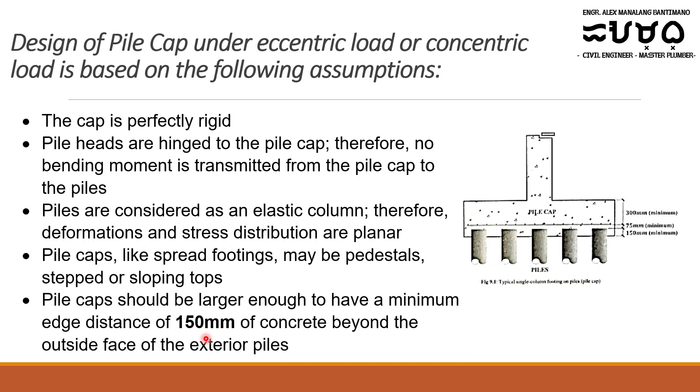Minimum of 150. Next, piles are embedded at least 150 millimeters into the cap. As I've said, the minimum embedment of the piles into the pile caps is 150 millimeters.

Reinforcement bars are placed at a clear distance of 75 millimeters above the pile head. So our reinforcement for the pile cap has a concrete cover of minimum 75 millimeters from the top face of the piles up to the outer surface of the reinforcement, elevated by 75 millimeters from the top face of the pile.

So to recap: from the bottom face of the pile cap, we measure a minimum of 150 millimeters as the minimum embedment of our piles. And from the top of the piles, we measure a minimum of 75 millimeters, where we place the reinforcement for the pile caps. Anyway, in the succeeding presentation we'll cover common placement of reinforcement in piles and pile caps.

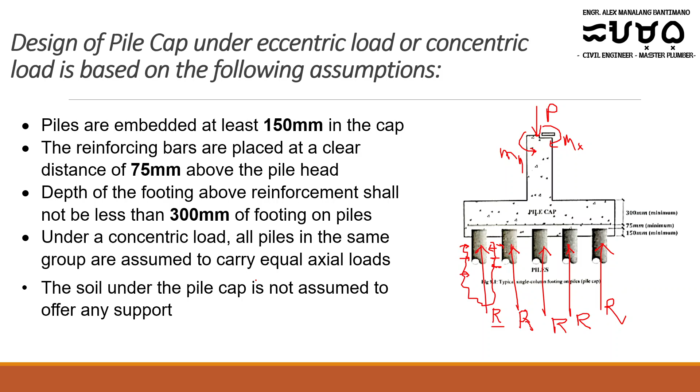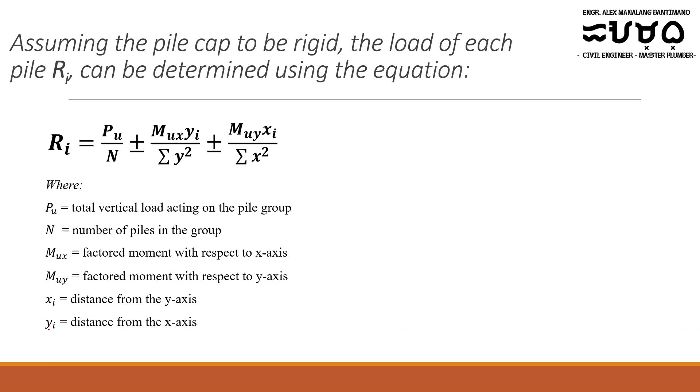So meron tayong general formula for biaxial bending: Pu over n plus or minus Mux yi over summation of y distance squared, plus or minus Muy xi over the summation of x squared, whereas Pu is the total vertical load acting on the pile group, n is the number of piles in a group, Mux is the factored moment with respect to the x-axis, Muy is the factored moment with respect to the y-axis, xi is the distance from the y-axis, and yi is the distance from the x-axis. So don't be confused on these parameters.

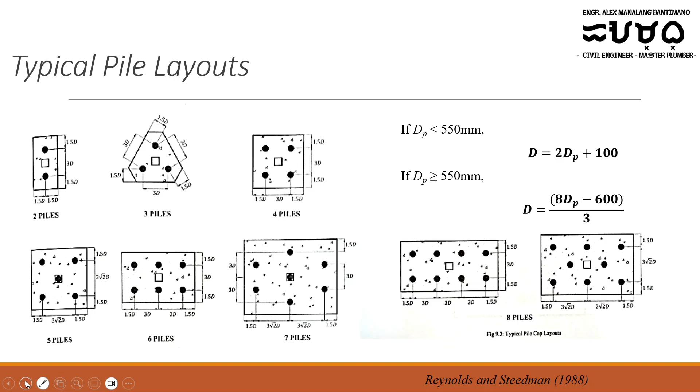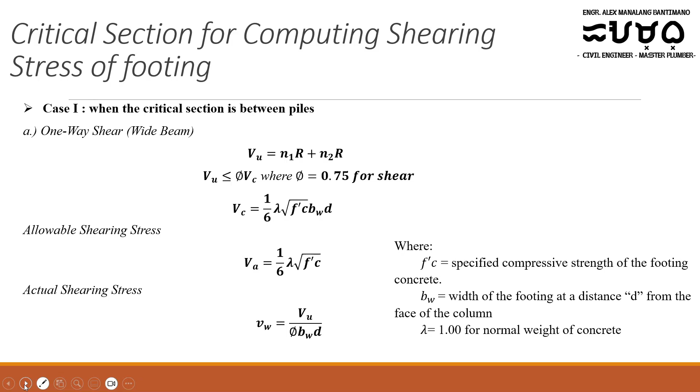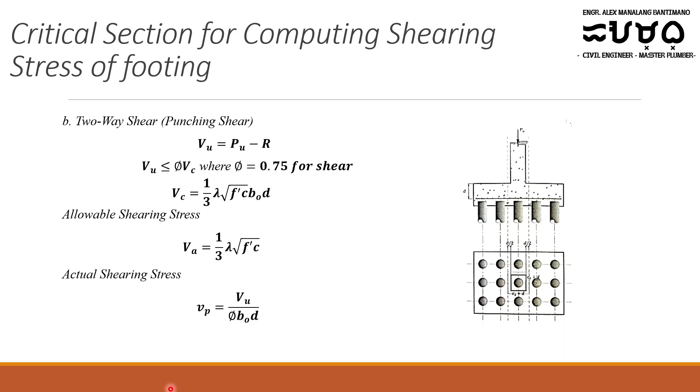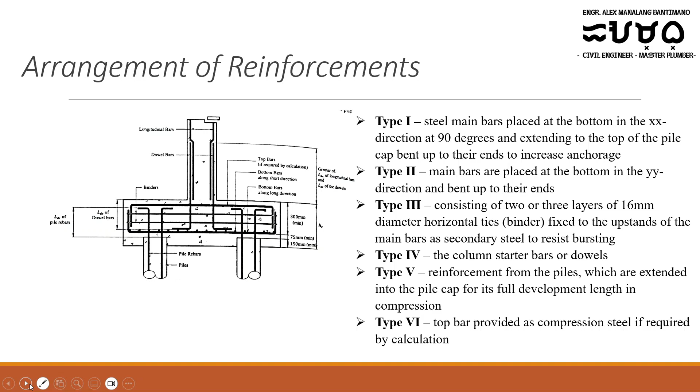Those are the common and most detailed arrangement of reinforcement. That is for the introduction for the piles and pile caps.

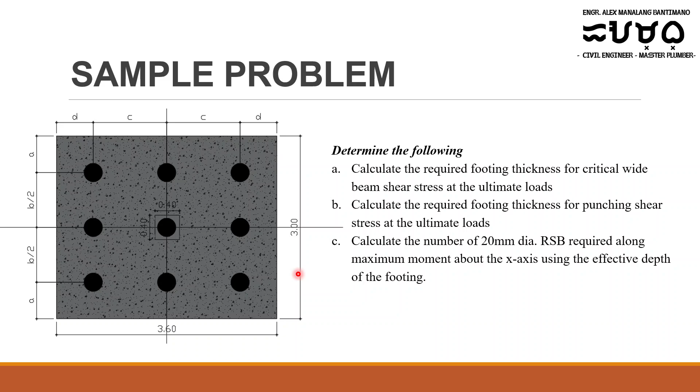And lastly, calculate the number of 20 millimeter diameter bars along the maximum moment about the x-axis using the effective depth of the footing. For the solution, letter A: calculate the required footing thickness of the critical wide beam shear stress at the ultimate loads.

First we have to compute the loads, PU = 1.2 times dead load plus 1.6 times live load. If we tabulate and compute 1.2 times 900 plus 1.6 times 450, we have a PU of 1,800 kilonewtons.

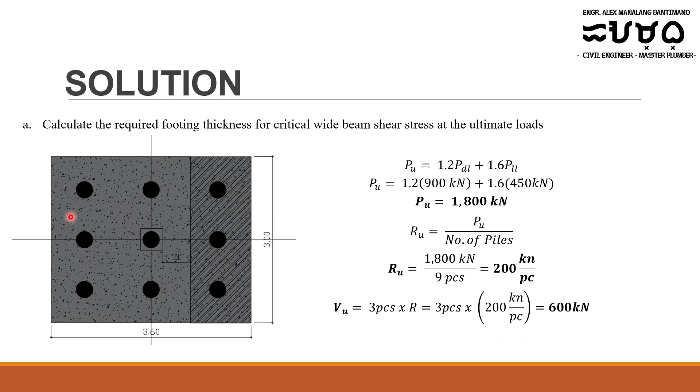So let me go back to this. If you notice, our section is rectangular in shape, 3 by 3.6. So actually you can also consider this section - hatch this, still 3 piles will be the number of piles here, similar to this equation.

However, if we use the 3.6 here, we would compute a smaller effective depth. So that means if we consider the 3 meter distance and the 3.6 distance, the 3 meters still governs, which gives us 350.87, because the smaller the denominator we divide by, the larger the value we get, and if the denominator is bigger, the result becomes smaller. So for this discussion or example, using critical wide beam shear, the thickness of our concrete pile cap, HC, is equivalent to 625 millimeters.

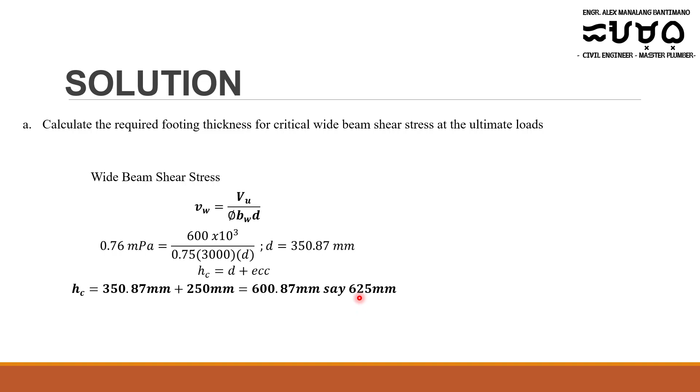Next, for the punching shear stress, again we offset half the distance from this column, and then we perform a hatch section like in this figure. So still, PU equals 1,800 kilonewtons, RU equals 200 kilonewtons per piece, and VU is PU minus 200, or 1,600.

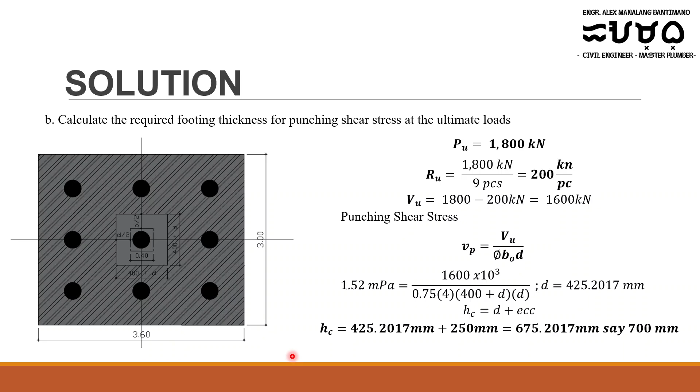So the governing value for this problem is 700 millimeters. Therefore, the actual effective depth is 700 minus 250, which equals 450 - let me compute that: 700 minus 250 is 450, our effective depth. Remember that the effective depth is 450 after we get the 700 thickness of the pile cap.

Next, calculate the number of 20mm diameter bars required along the maximum moment along the x direction - this one.

Using the effective depth we got earlier of 450, let's check if it's tension controlled. So 459 divided by 1600 beta 1 F prime C BD squared, quantity 1 minus 3 over 16 beta 1. So if we substitute the values given for this problem...

459 divided by 1600 times 0.85 times 21 times 3,600 for this face, 450 squared, quantity 1 minus 3 over 16 times 0.85. So our moment will have a value of 3,138.05646 kilonewton meter.

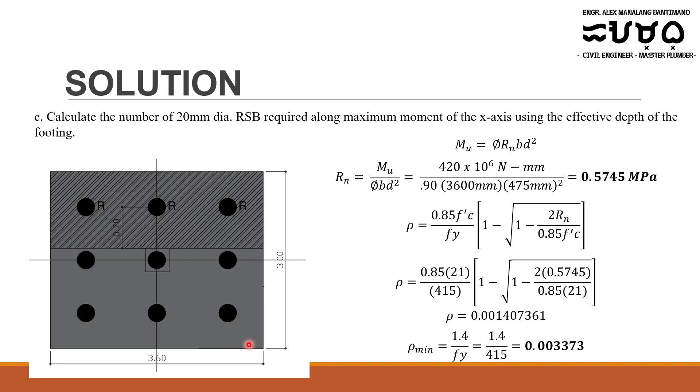So this reinforcement ratio is what we'll use to identify the area of steel reinforcement required, which equals the product of the steel reinforcement ratio multiplied by B multiplied by the effective depth, or 0.003373 times 3,600 times 475, which yields...

5,767.83. For the number of bars, we divide 5,767.83 by the area of one 20mm bar, or 0.25 pi 20 squared. If we divide those values, we get 18.359, say 19 pieces.

So this is 19. We need to round it up. So number of pieces is 19. Again, since we got 18.359, we round it up, so we get 19 pieces of 20 millimeter diameter bars.

Okay, so that is for this direction.

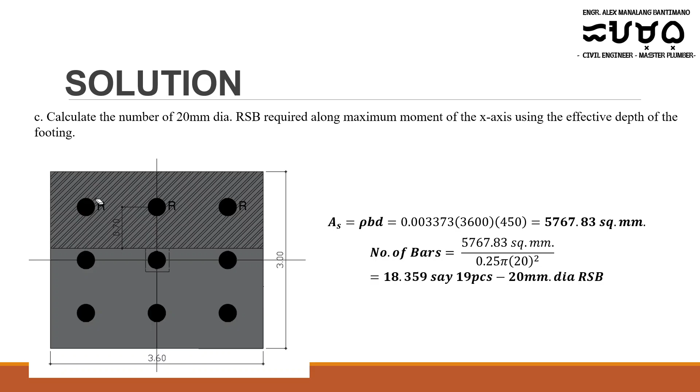So that's it for the design and analysis of pile caps for the subject of foundation engineering.